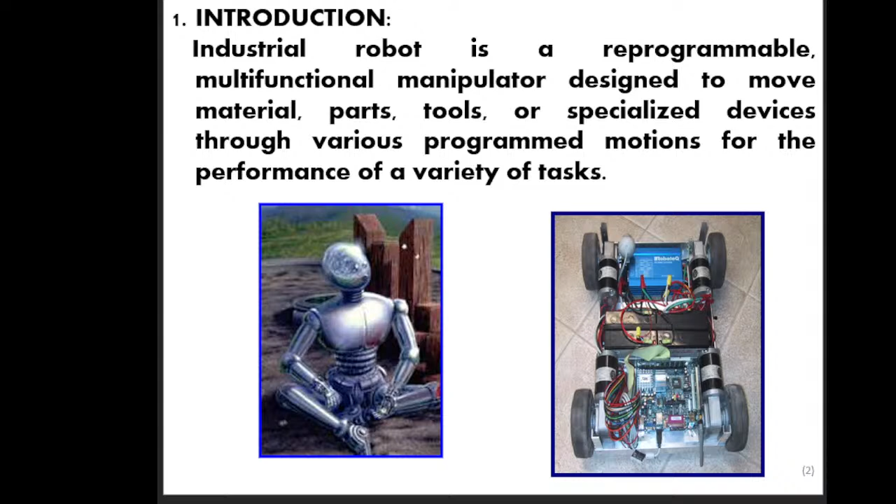Then another component is the controller. In the controller, we can say this is our brain. So the controller issues instructions to the robot, controls peripheral devices, and interfaces with the robot and also with the human.

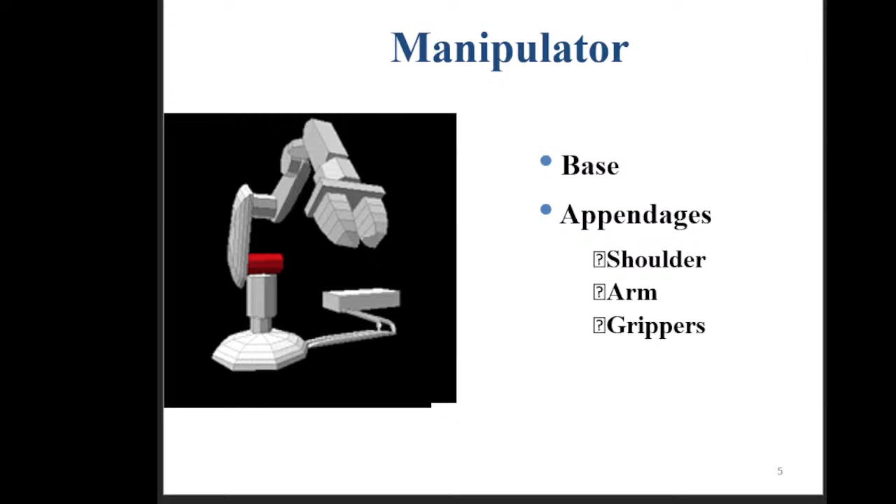Then end effector. We can say this is the end effector, also called the hand. This is a special tooling device. There are two types: one having a gripper, used for holding objects, and another having tools. At the end of it, this is called the hand, so here we can change it. Instead of a gripper, we can use tools like a spot welding attachment, spray welding, spray painting, and other devices to perform other works.

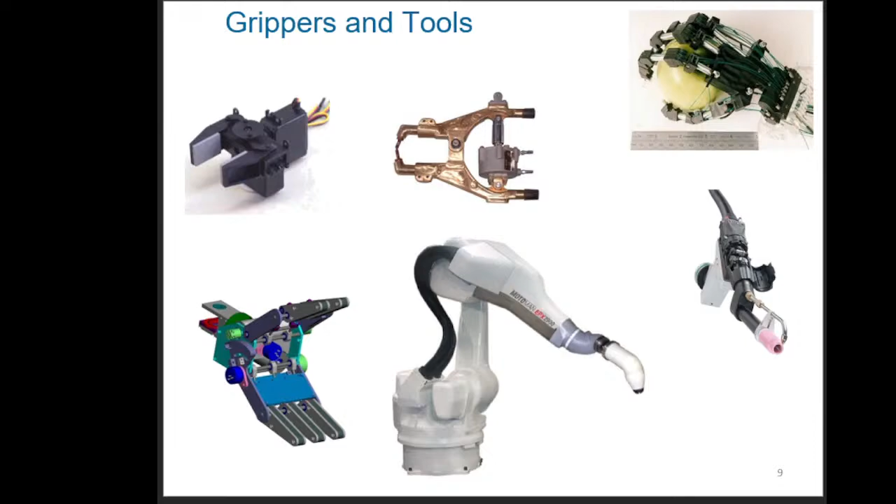So you see the gripper - this figure and this, all are grippers. They are having a 4-finger gripper, and this is called the tool. By removing the gripper, we fix the tool for gas welding, or arc gas welding purpose, and this one is for painting purpose. Then power source.

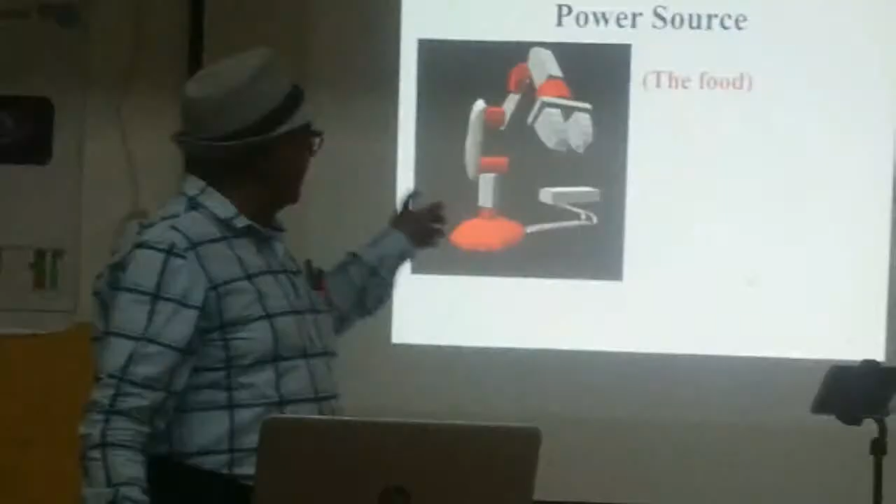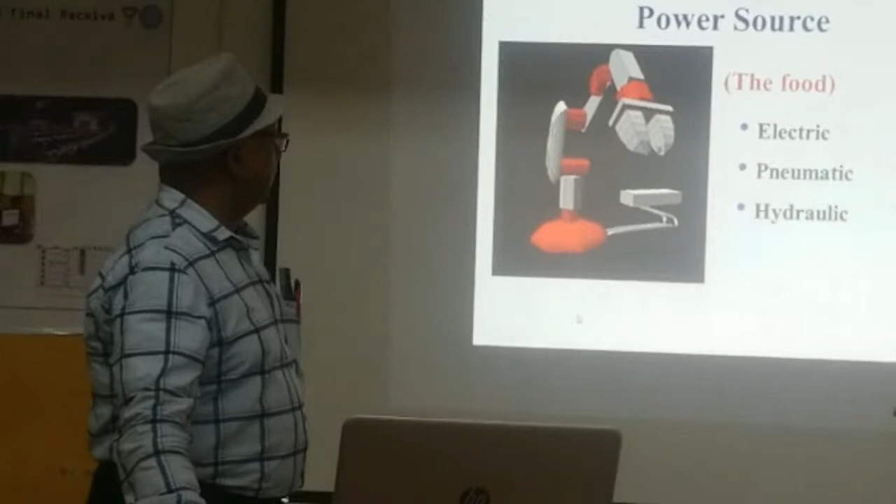Power source is just like our food. For us also there is a need for food; for robots also power is required. So you can find out by this color indicating where power is needed. For us only one person has a mouth for eating, but robots have different power sources required - so you can find the red color indicating where power is needed. They have different power sources: one will be electric, pneumatic, and hydraulic.

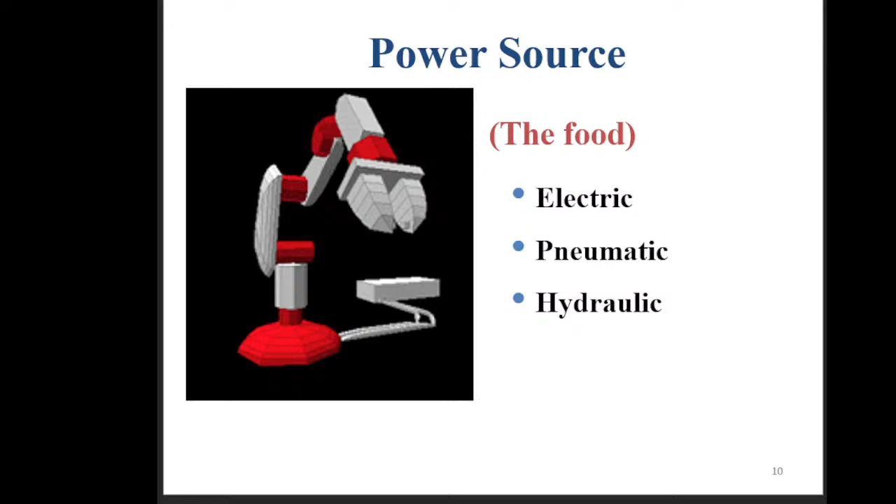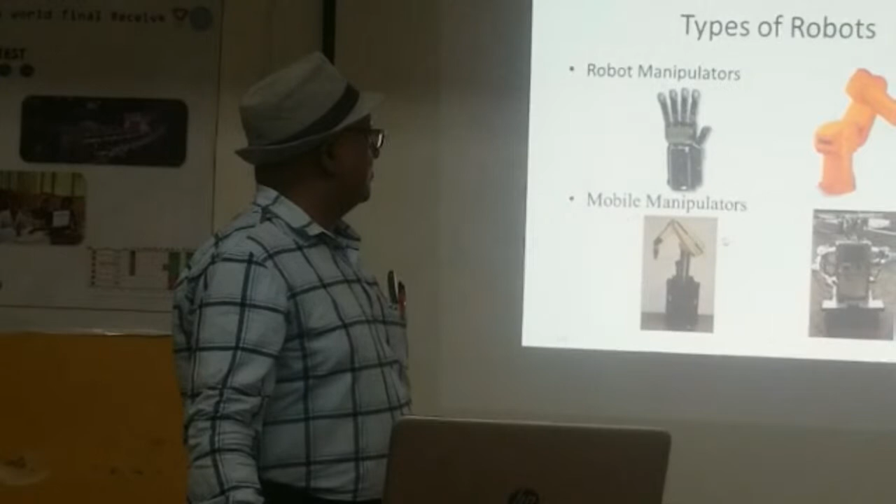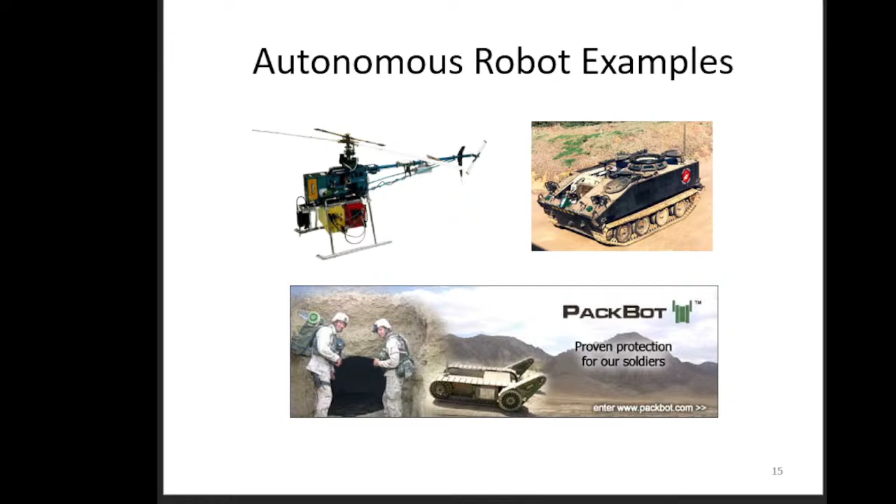Robot configuration: in robot configuration, one has robot anatomy, meaning structure. So in a robot there will be a manipulator. The manipulator consists of joints and links, and this robot manipulator we can divide into two sections: one will be the body arm, and another will be the wrist assembly.

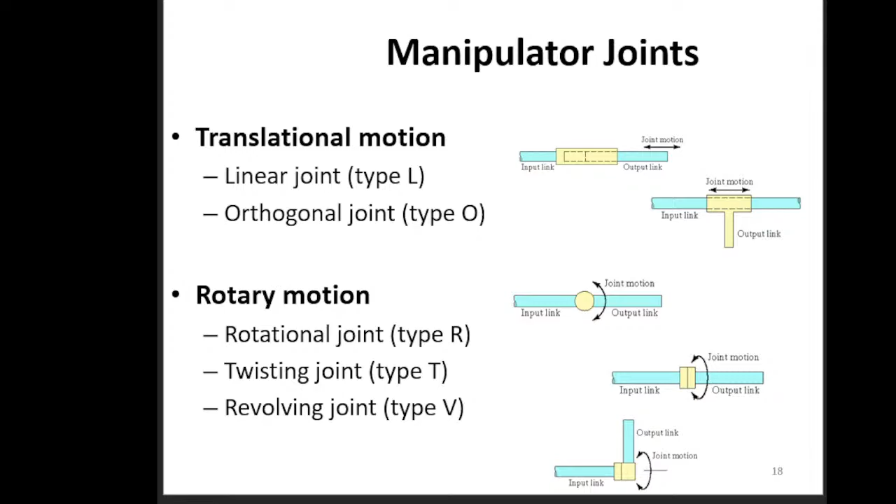Manipulator joints - how movement takes place about the joint. One is translational motion, where there will be linear movement and orthogonal joint, denoted by O. Then rotary motion, having rotational joint, twisting joint, and revolving joint. These are the different types of joints, denoted by different symbols.

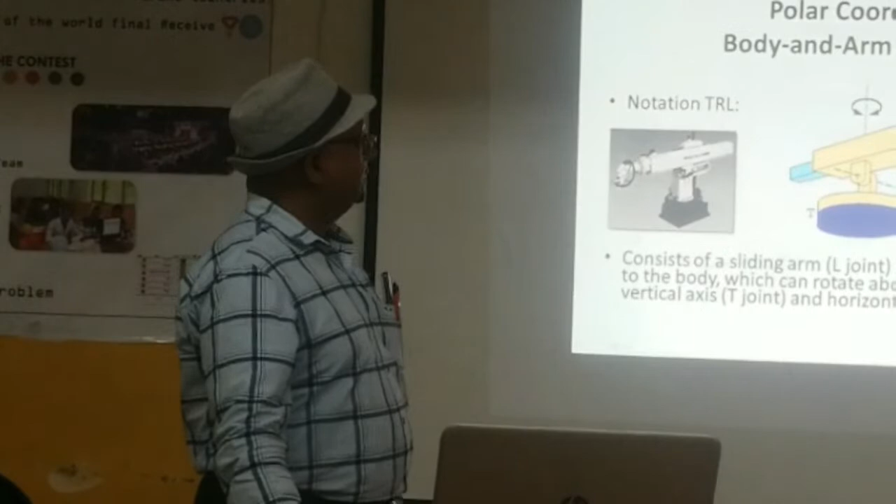In the polar coordinate body arm assembly, this type of robot has three movements: one twisting, one rotating, and another having a linear movement.

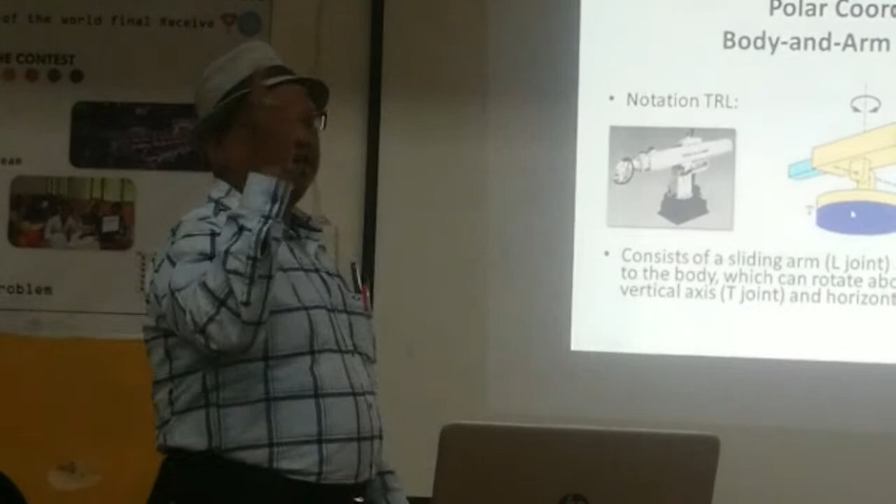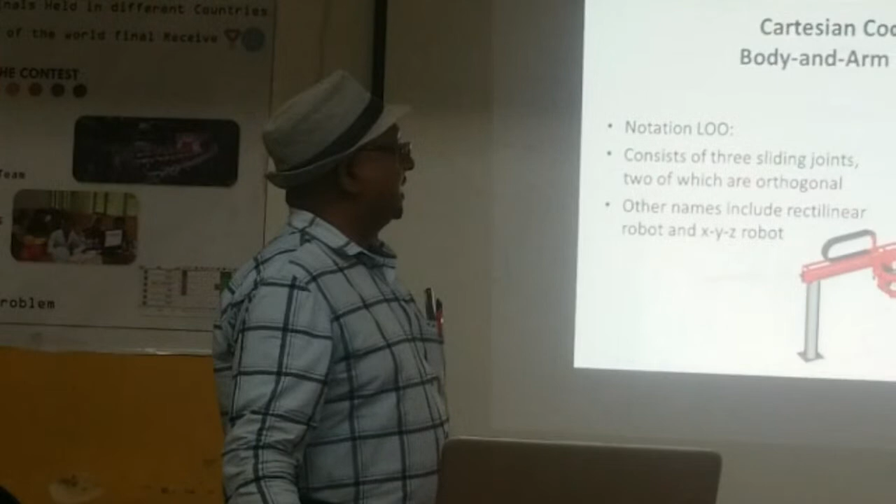Then another type, the cylindrical body arm assembly robot - in this there will be twisting, then linear movement, then orthogonal movement. Then the Cartesian coordinate body arm assembly has linear movement, then orthogonal movement, and another orthogonal movement.

Joint arm robot - in this there will be twisting, then rotating, and then another rotating.

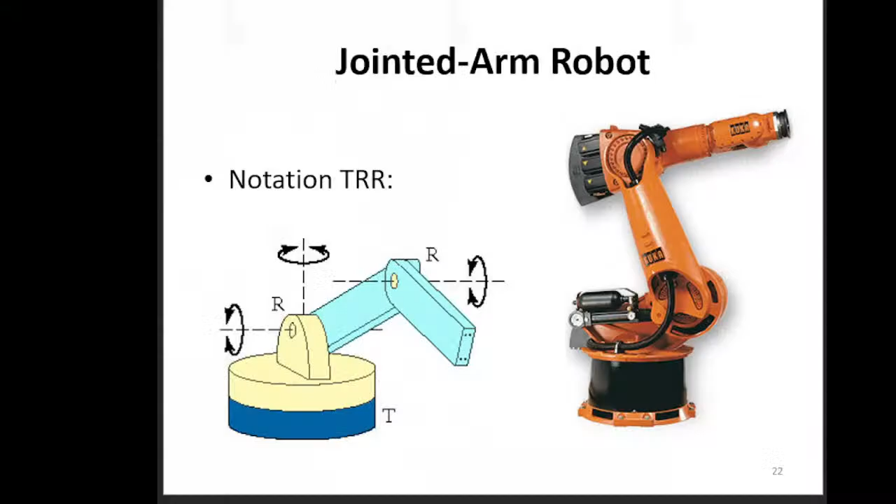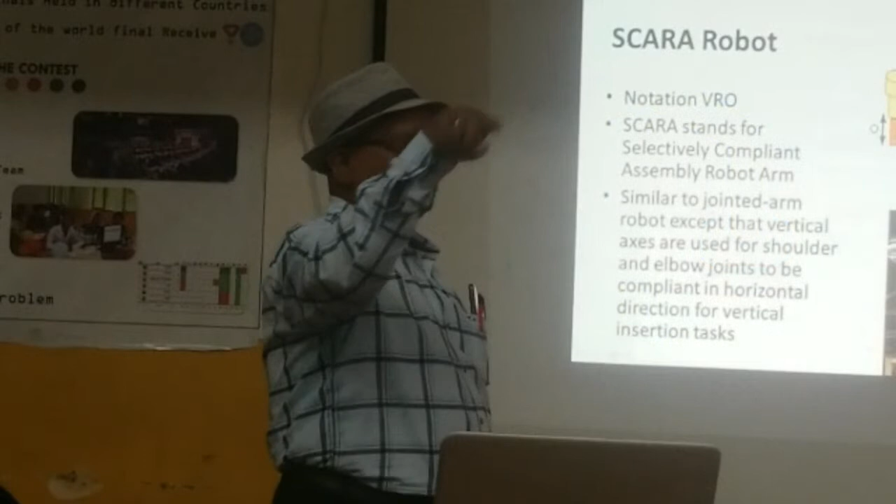Then another type is the SCARA robot. In case of a SCARA robot, there will be revolving, not twisting, then rotation, and then orthogonal movement.

Then wrist configuration - the wrist assembly is attached to the end of the arm, and it consists of roll, then yaw - yaw means this kind of movement - then pitching, like pitching is there. I think we have studied this in mechanics of machines, where they have a gyroscopic couple, in which we can find roll, pitch, and yaw.

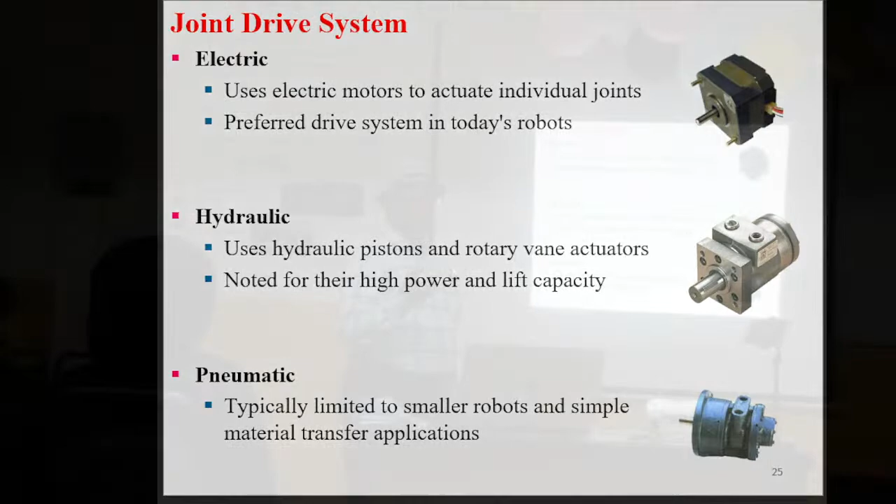Then joint drive system. Now we have seen regarding the configuration and different types. Now let's see how the drive system will work.

There will be an electric system, where electric motor is used to actuate individual joints. In case of hydraulic, they use hydraulic piston and rotary vane actuator. Pneumatic systems are limited for small robots.

Then robot control system. For controlling the robot, there are different systems: limited sequence control, playback with point-to-point control, playback with continuous path control, and intelligent control. These are the different types of control systems.

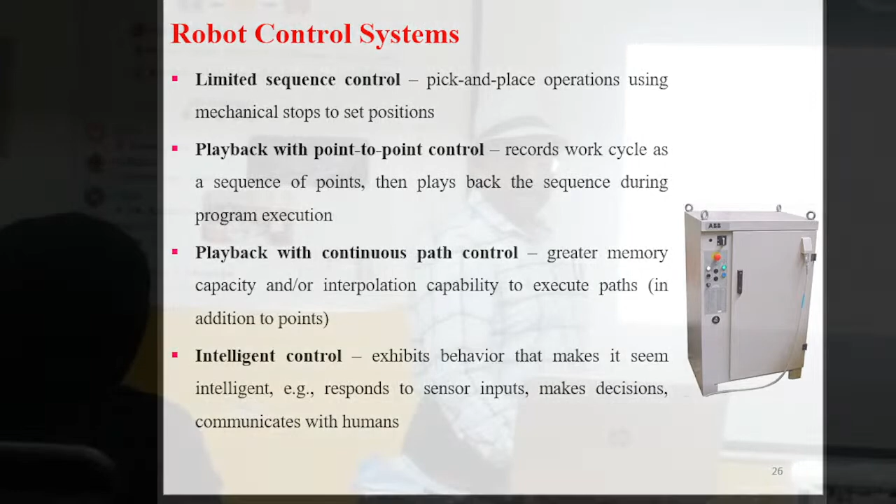Now come to the robot sensor. Why are we using sensors in the robot? The sensor is used to measure the condition of the robot and its surrounding environment. Why do we need a robot sensor? Because for smooth functioning of the robot, they have different types of sensors.

When you go to the 4th year, mechanical department has a mechatronics course, and maybe other departments also have mechatronics. So we are teaching different varieties of robot sensors. How many types of main sensors are there? There are 7 types of sensors that I am going to display here.

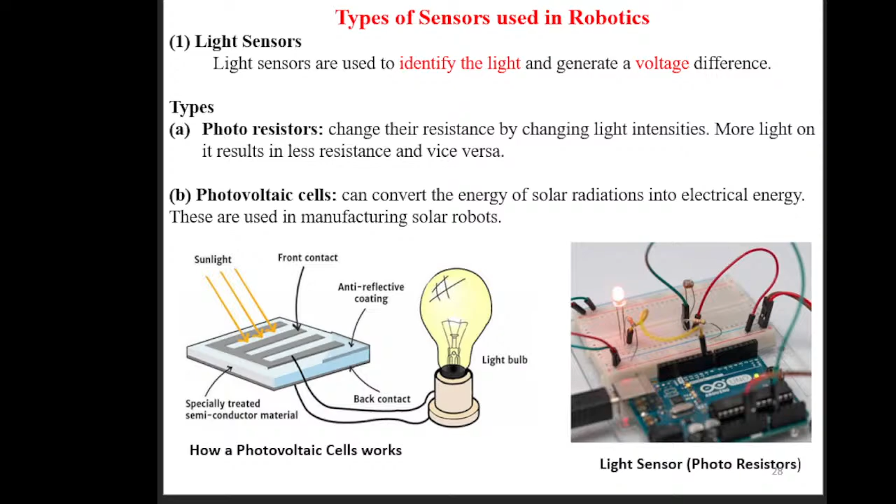One is the light sensor, used to identify light and generate a difference of voltage. They also have two types: photoresistor and photovoltaic cell. So we can see the figure.

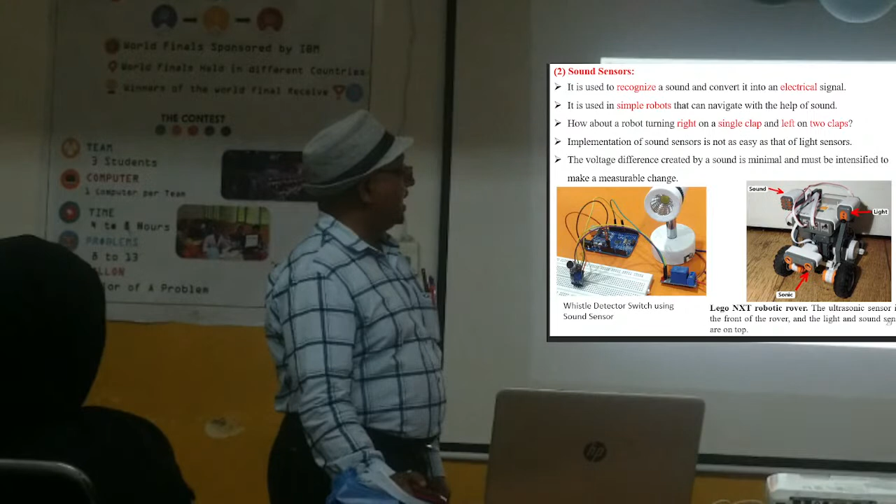Then sound sensor. It is used to recognize sound and convert it into an electrical signal. So with the help of sound, if you give one clap, the robot will turn right. If you give two claps, it will turn left. You can see here one sensor in the Lego NXT robotics rover, which has an ultrasonic sensor in front, a sound sensor, and a light sensor. Accordingly it will work.

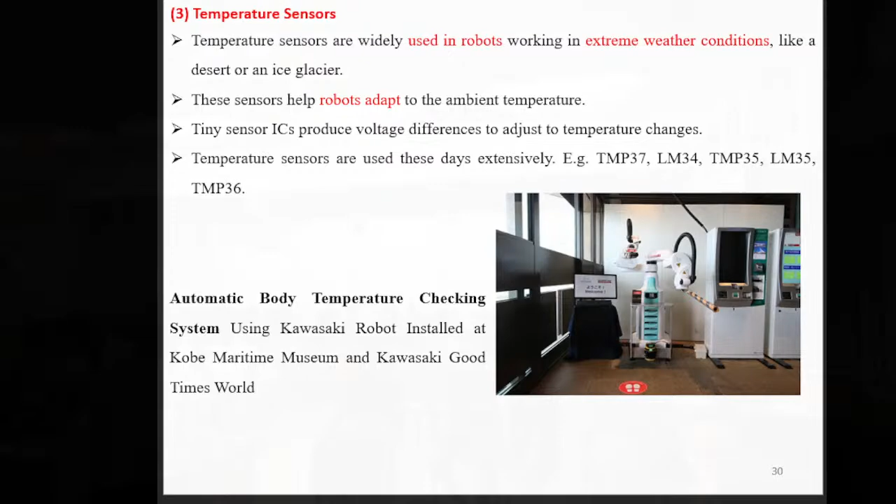Then temperature sensor. Temperature sensors are also used in robots where the working environment is an extreme condition, like a desert area or ice glacier. We can find here a Kawasaki robot installed in the Kobe Maritime Museum. This robot has automatic temperature sensing devices included. So when a person goes inside, it will measure the temperature of the room of the museum and automatically display it. So this is regarding the temperature sensor.

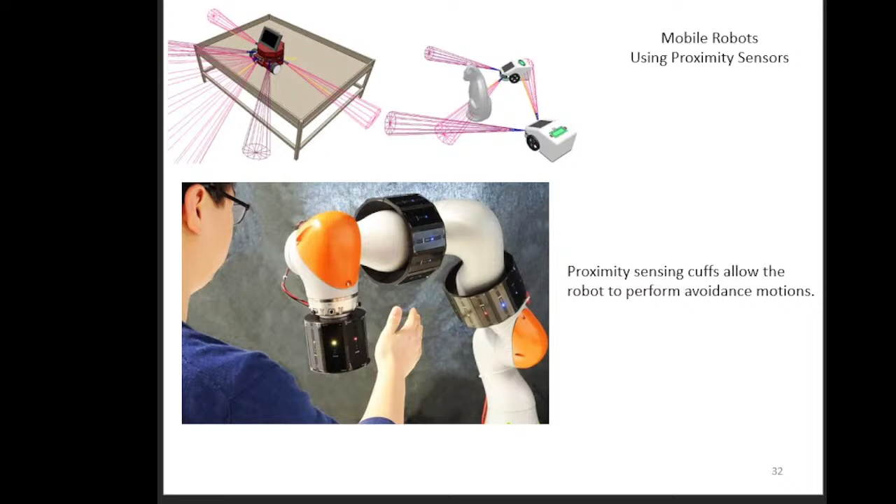Another is the force sensor. In this, the robot is gripping, catching a component and placing it from one place to another, and this happens due to force only. If there is less force in the gripper, it cannot transfer the component from one place to another. So according to the requirement, how much force is required to catch and move the component, this type of sensor is added there.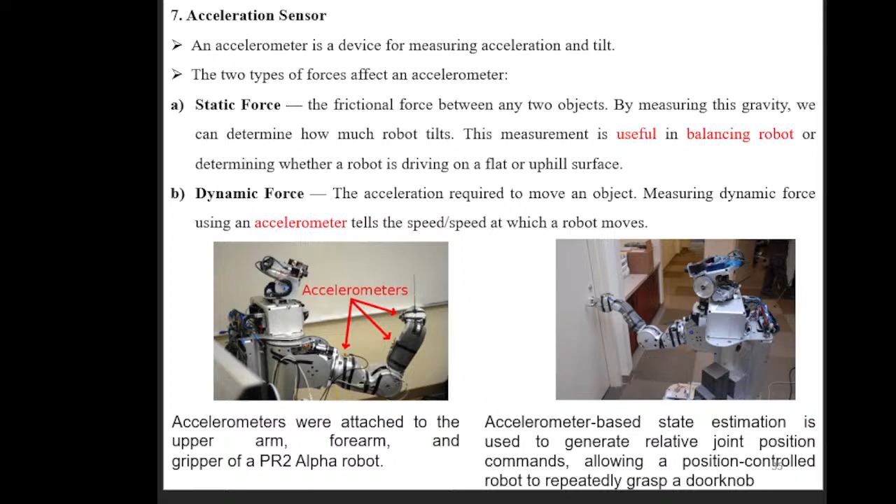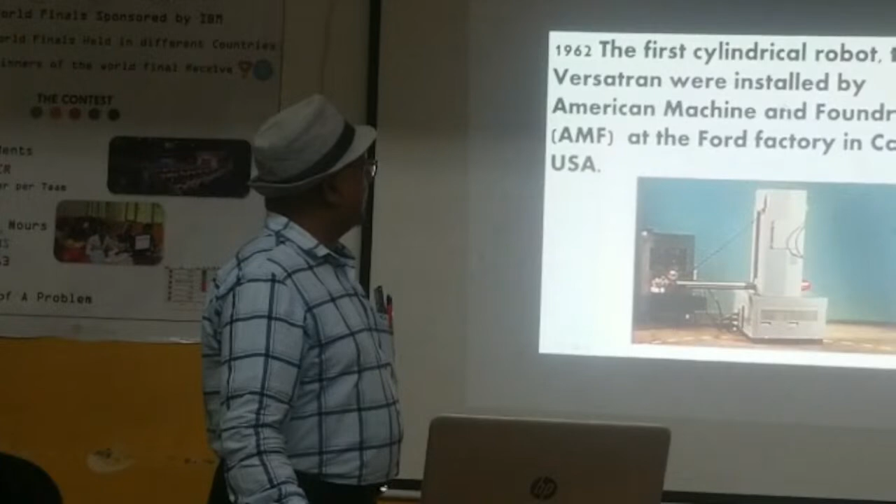After that, in 1961, Unimation USA installed the first industrial robot used on a production line at General Motors. Then in 1962, the first cylindrical robot was installed by the American Machine and Foundry at a Ford factory in Canton, US. In 1969, General Motors installed the first spot welding robot at its Lordstown assembly plant.

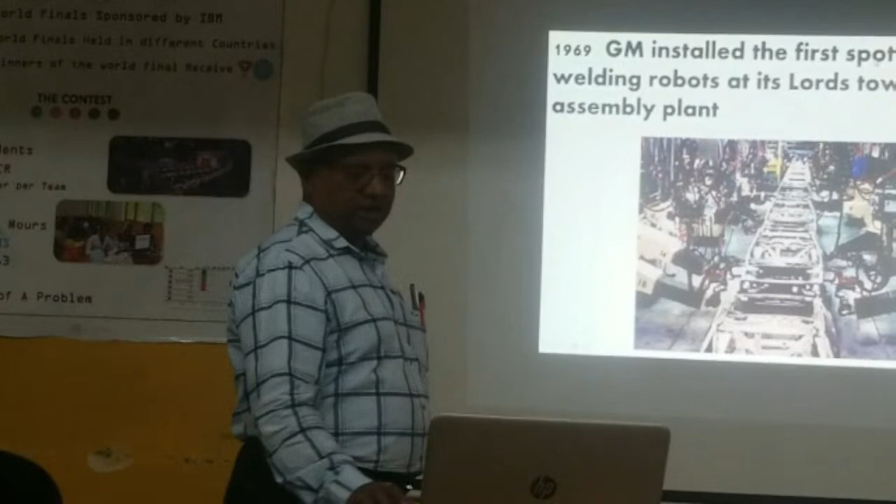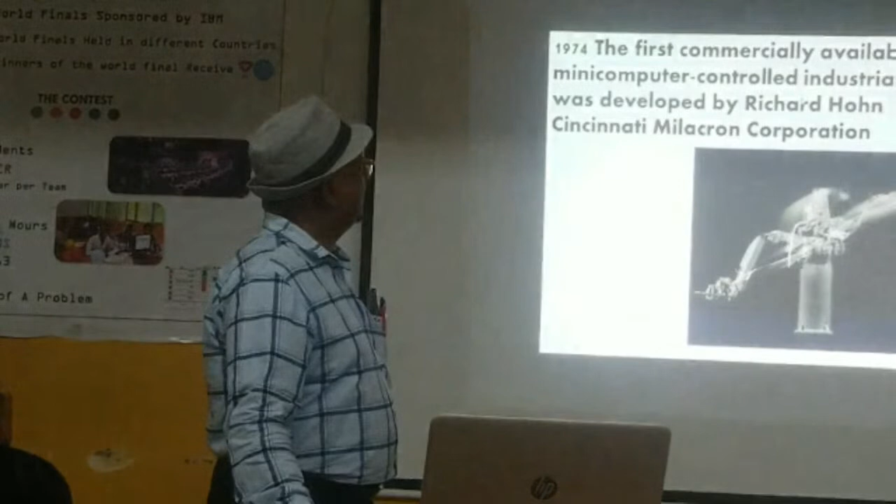In 1969, Tralfa Norway offered the first commercial... In 1974, the first commercially available mini-computer controlled industrial robot was developed by Richard Hohn.

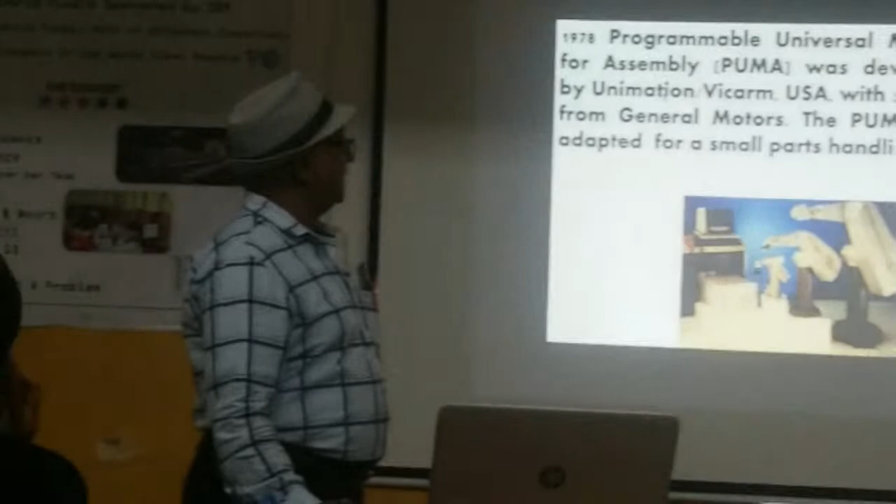You can see the figure. In 1978, Puma was developed by Unimation USA with support from General Motors, and this was used for small part handling.

In 1985, the KUKA robot came. KUKA robot, Germany, introduced a new Z-shaped robot design that ignored the traditional parallelogram, giving it flexibility. 6 degrees of freedom were developed in this robot.

In 1992, Demaurex, Switzerland, sold its first Delta robot packaging application to Roland. This was used for packaging purposes.

In 1998, ABB Sweden developed the world's fastest picking robot based on the Delta robot.

In 2004, Motoman Japan introduced an improved robot control system. You see how many axes it has - up to 38 axes. Then in 2006, KUKA Germany presented the first lightweight robot, suited for handling and assembly tasks.

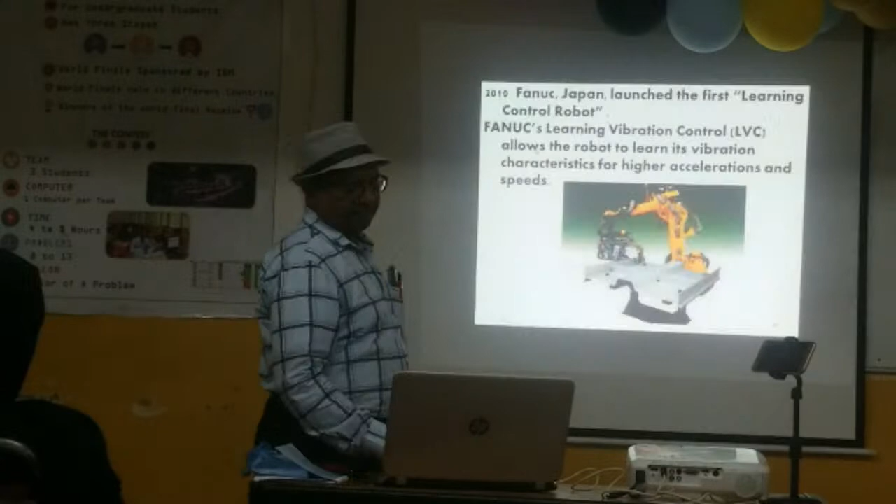In 2010, Fanuc Japan launched the first learning control robot. Then the Asimo robot - the Asimo robot is a humanoid robot developed by Honda.

Entertainment robot - after that, entertainment robot from Sarcos. Another one, Cog, is also a humanoid robot developed in the MIT lab, based upon artificial intelligence.

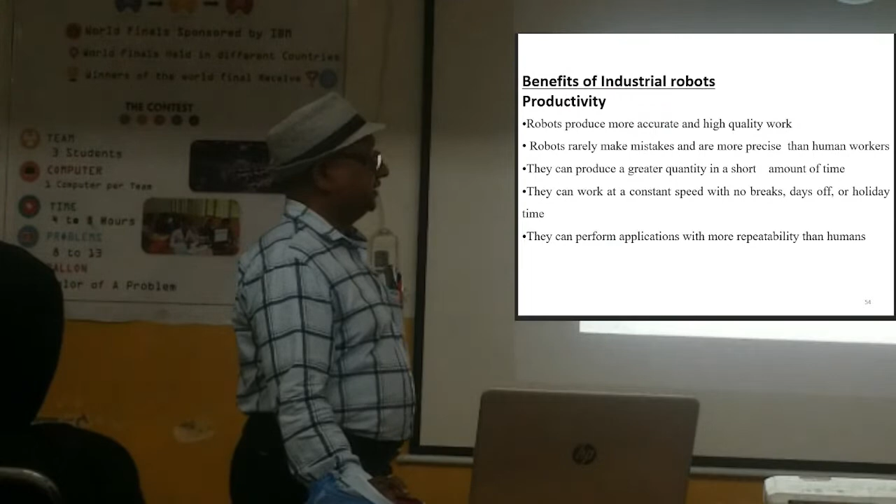Now, benefits of industrial robots. What are the benefits? Productivity - robots produce more accurate and high quality work. Robots rarely make mistakes and are more precise than human workers. They can produce greater quantity in a short amount of time, and work at a constant speed with no breaks, days off, or holidays for the robot.

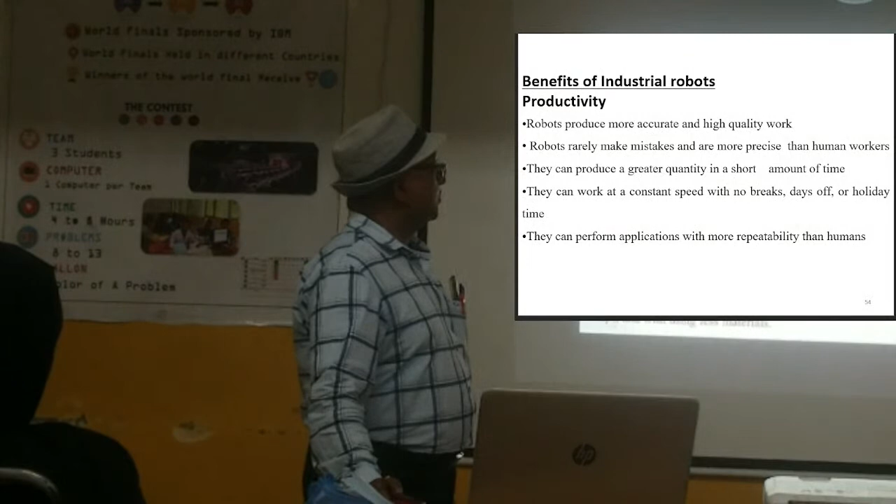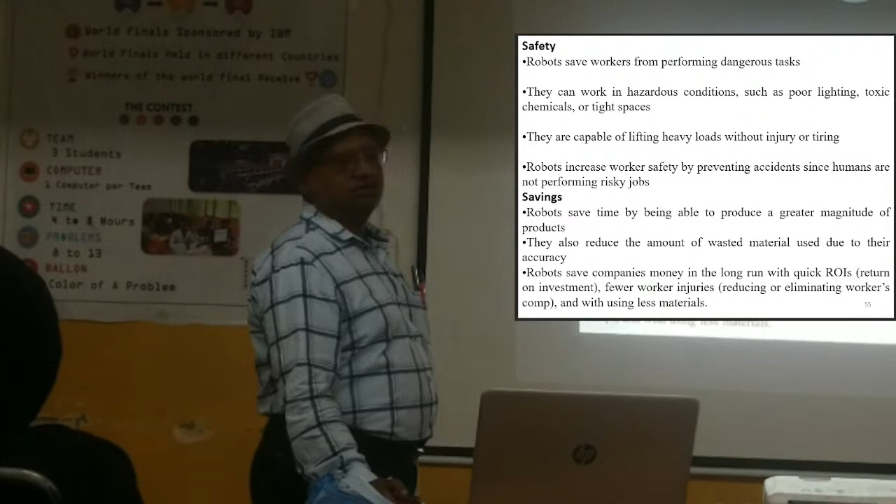In case of saving, robots save time by being able to produce a greater magnitude of product. They also reduce the amount of waste material used due to their accuracy, and robots save companies money in the long run with a quick return on investment.

These robots are commonly used for material handling parts as well as degating and finishing operations like deburring and grinding.

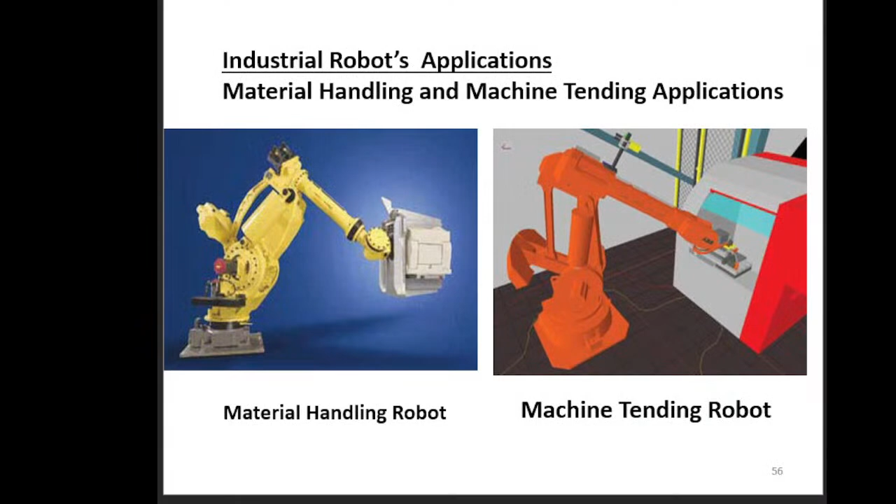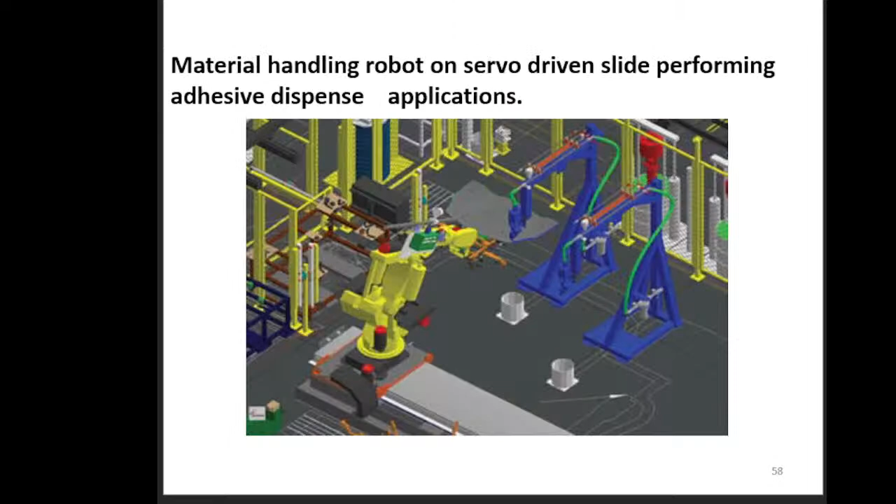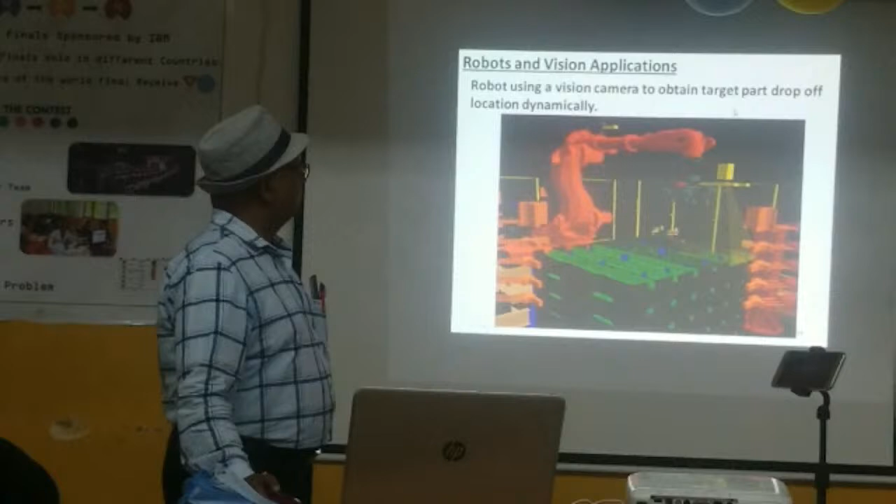Another having robot and vision application - you see these robots having a vision camera also. The robot uses a vision camera to obtain the target part's drop location dynamically. The robot performs vision inspection on an auto body as part of a flexible measurement system. This type of robot we can find in the automobile industry.

Then cooperative application and coordinated motion - you see there are two robots, one handling the parts and another doing the operation.

Here, a single robot is used to organize a small quantity of inventory to efficiently stage individual orders to be shipped. Here, two robots are used to load, unload, and weld parts with little human intervention and a high degree of accuracy.

Then robot and cycle time. Robot speeds the palletizing of motors while reducing waste and concern of workers being hurt.

Then articulated industrial robots operating in the foundry industry, also using industrial robots. Then here you can find a 6-axis industrial robot used for welding purposes.

Then here you can find factory automation with industrial robots for palletizing food products like bread and toast at a bakery in Germany.

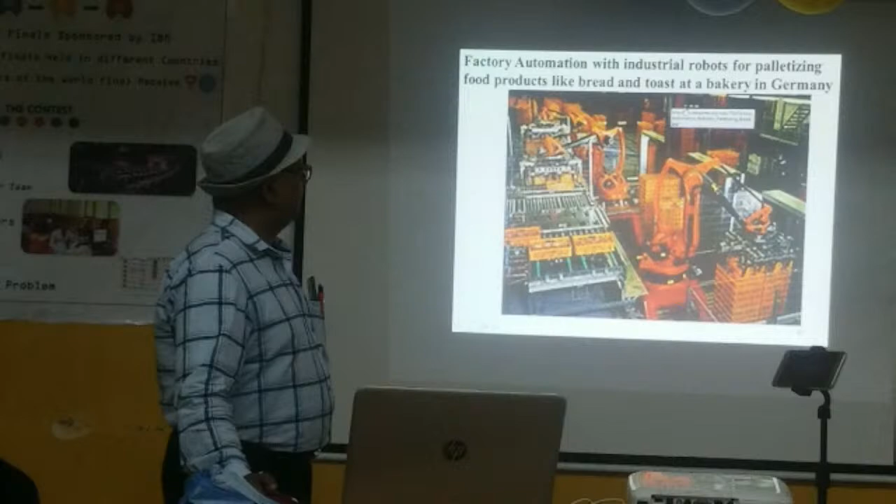Then robots are currently used in the police, army, navy and air force also. Now with the Ukraine and Russia fighting going on, we can see such types of robots doing the work.

Then NASA scientists use robotics technology for Mars exploration. Here also they are having robot technology.

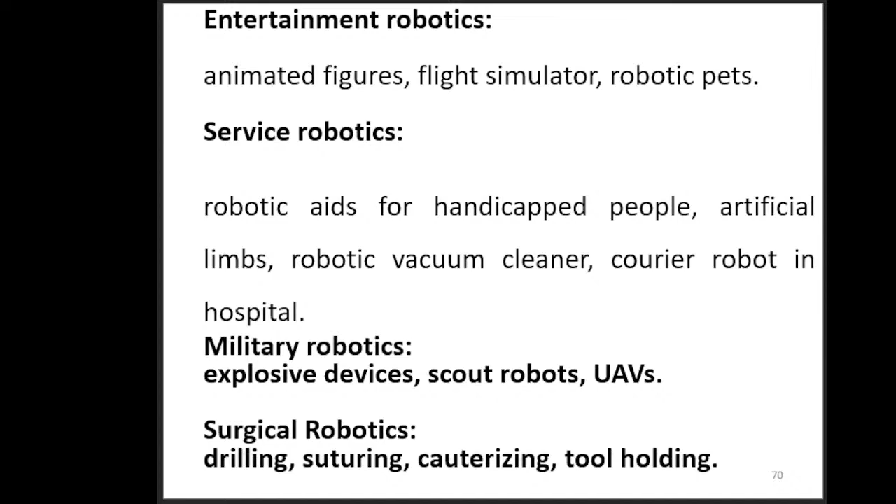Then another type of robot is used in animation and entertainment robotics, like animated figures, flight simulators, and robotic pets. And in the service robotics area, robots are used for handicapped people, artificial limbs, robotic vacuum cleaners, and courier robots in hospitals.

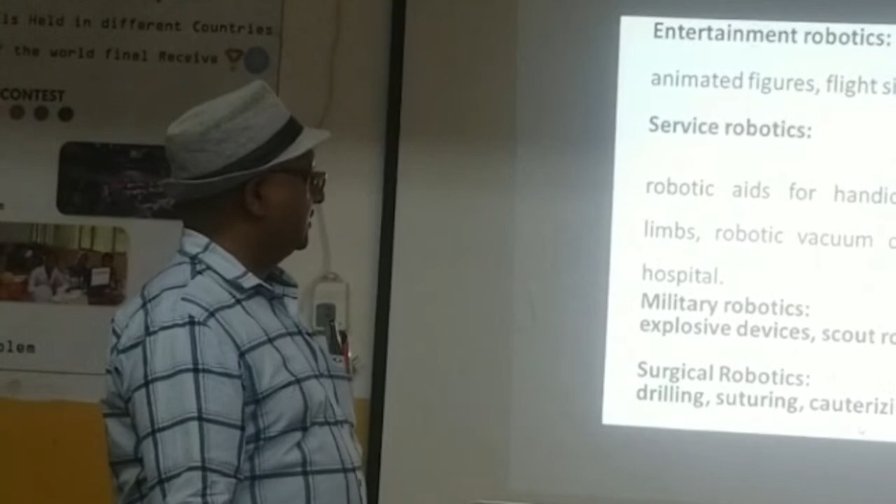Another area, military robotics, involves explosive devices, scout robots, and unmanned aerial vehicles. And in surgical operations also, there are surgical robots for drilling, suturing, and tool holding in that area.

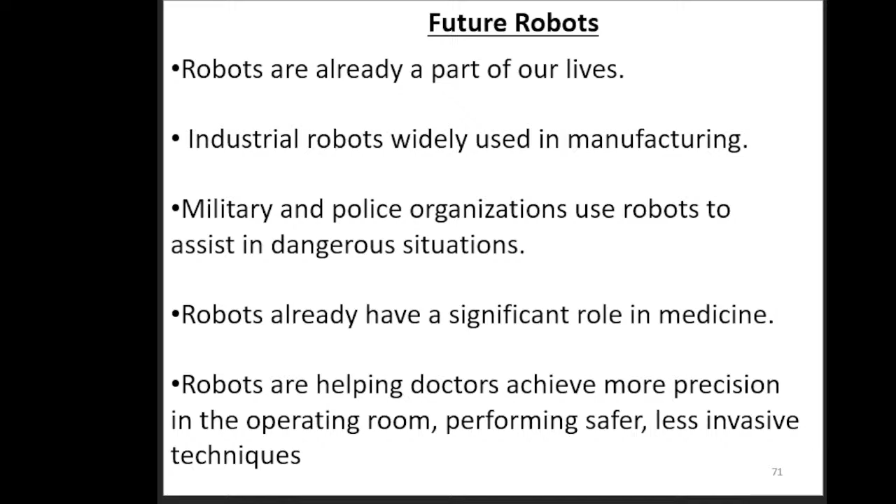Then future robots. So by seeing this, you can find out where they are using robots. Now robots are already a part of our life, and industrial robots are widely used in manufacturing. Military and police organizations use robots to assist in dangerous situations also.

So that future robot, for civil use in the future of robots in civil applications, around 2023 or nearer to that, there will be full automation in heavy machinery.

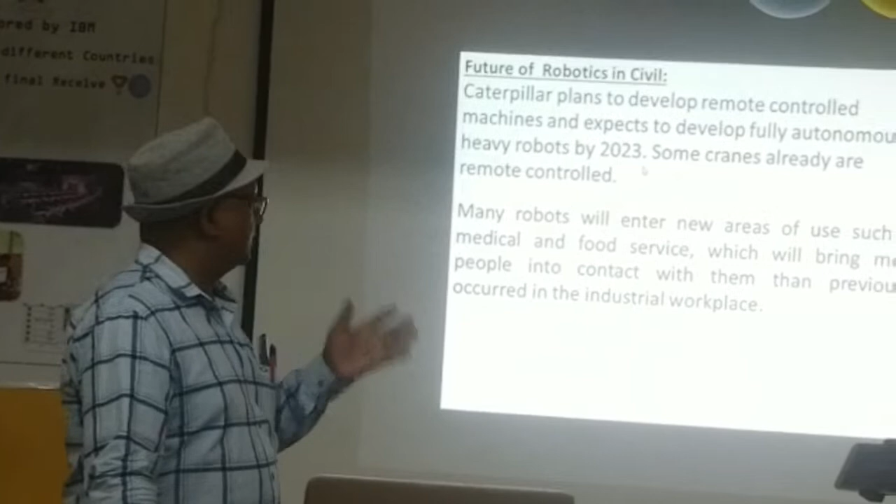Now also you can find, for building construction also, they are using different types of robots. Another area is handling dangerous radioactive waste, where they are also going to use robots. Exploration, mining, construction - in this area also they are going to use robots.

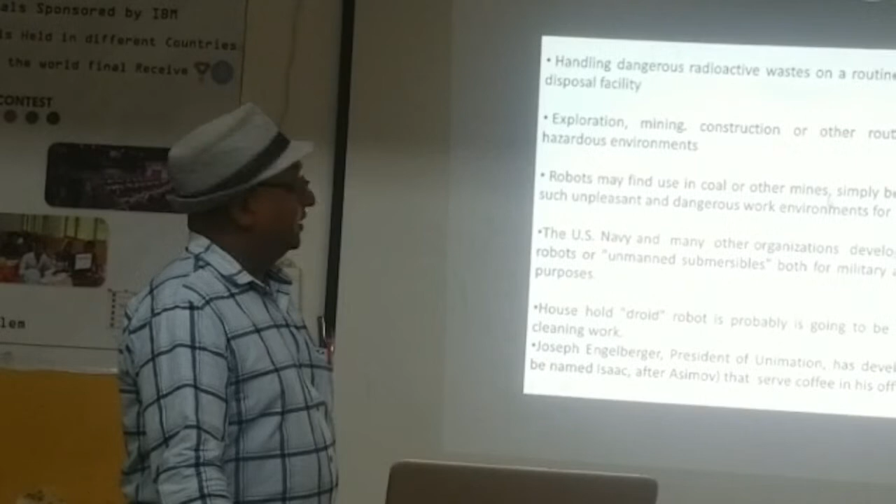Robots may be found in coal and other mining areas. And the US Navy and many other organizations are developing robots to work as a force, like the army.

So here in future robots, they are having a Demeter robot. This robot will harvest the crops according to the sensing devices involved in it.

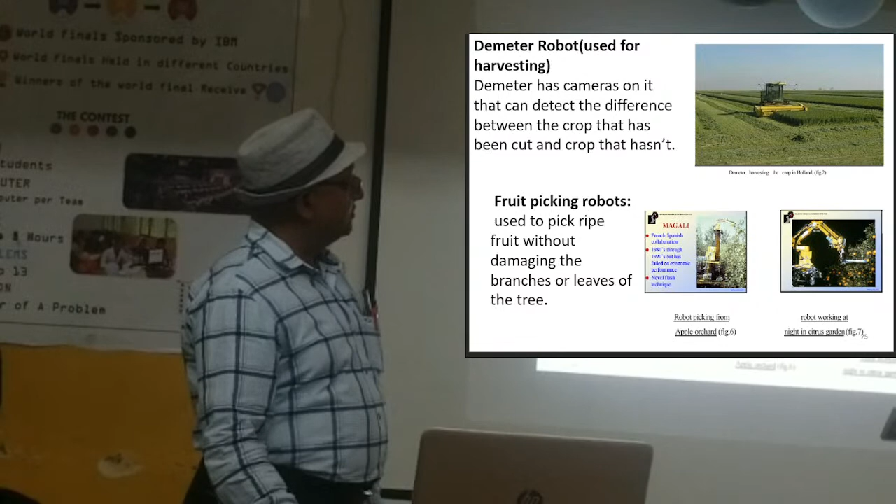So if some area has crops ready for cutting, it will cut only that; other areas it will not cut. That's why it's written here that Demeter has a camera on it that can detect the difference between crops that have been cut and crops that have not.

Correct? Another one is the fruit picking robot. So in the future there will also be a fruit picking robot.

So as I told you, different types of sensors like light sensors are used. By seeing with the help of lighting, the robot can identify if the fruit is ready for plucking or not. If it is ready, then it will pluck the fruit. So that's why in the future, fruit picking robots will also be available.

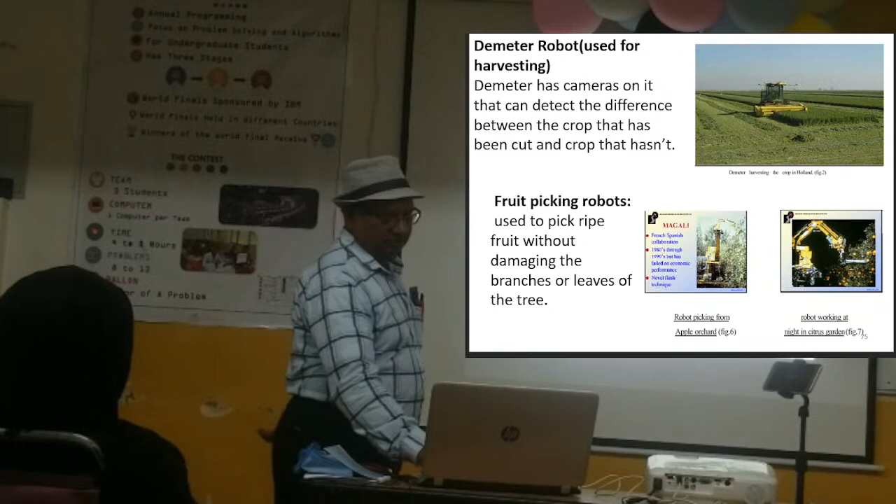Now we have seen the different types of robots. They are going to be used in the future also, and presently also they are working. Now they are using artificial intelligent robots.

Artificial intelligent robot - I think you might know, the first artificial intelligent robot named Sophia was developed. You can see the video, you can talk with her.

Sound is not coming. I don't know if there is sound or not, but I think the sound is not reaching up to you, correct? But I have given full sound, I don't know what the reason is.

Robotic Kitchen: a robot designed to cook for you so that you can concentrate on other things.

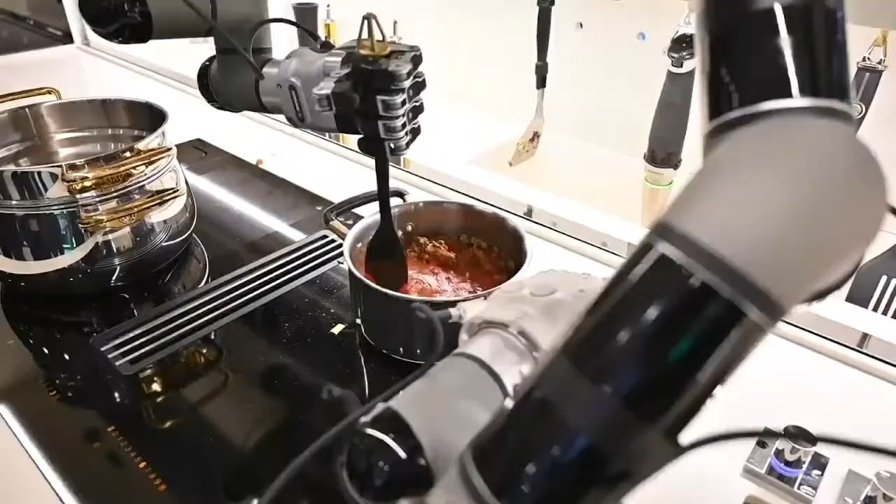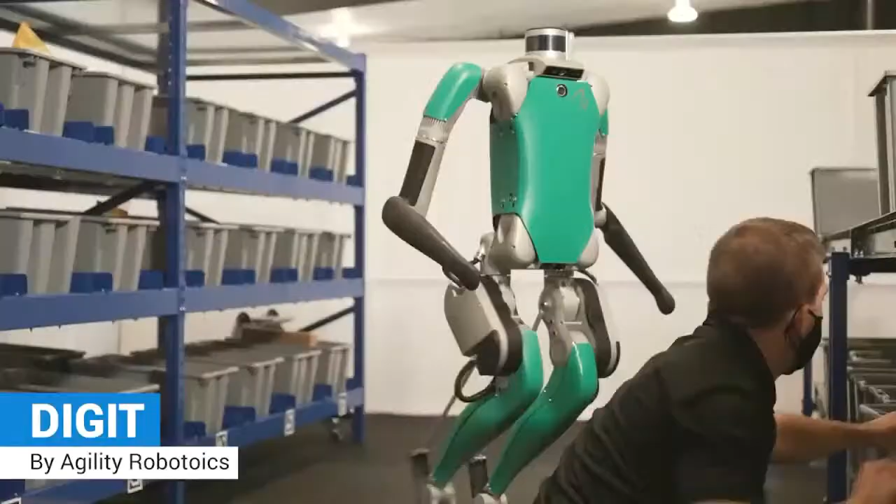Digit: a humanoid robot that is designed to work with humans and in human spaces.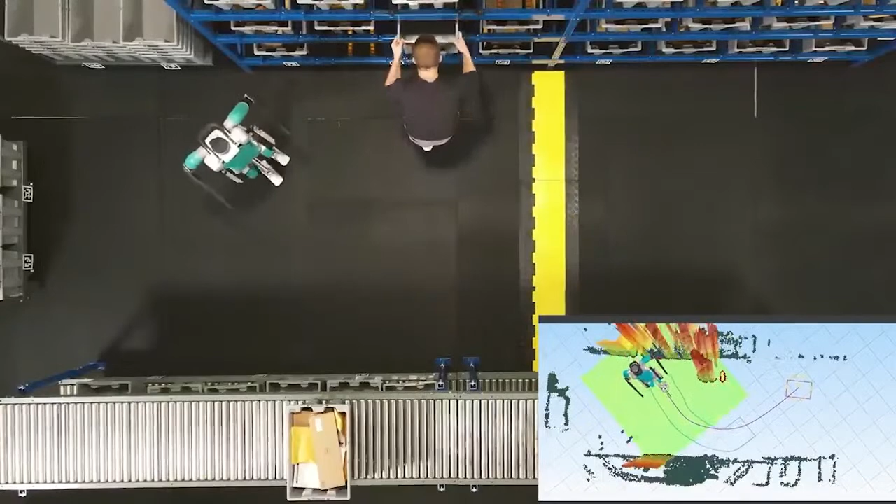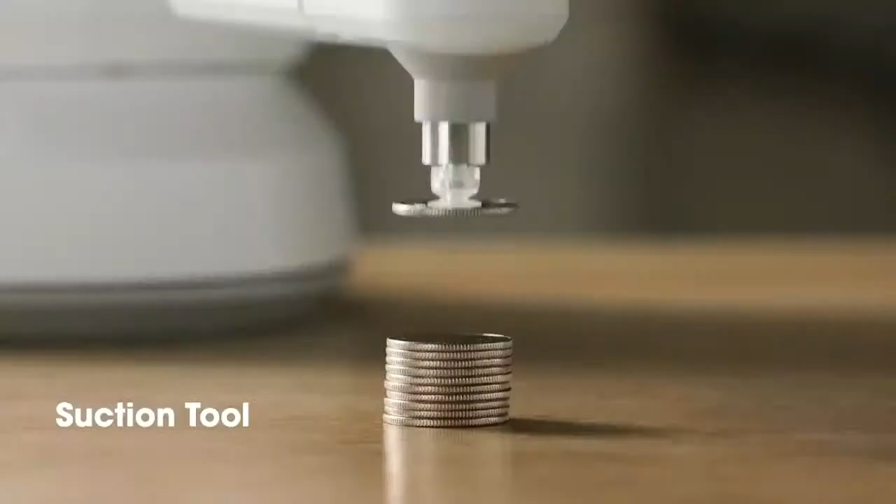So you can see in the future about how it will work. So there is a prediction also. This is what I am saying, it is going to get exist.

Because in future, after some years, see, temperature is increasing and increasing. So after a few years, temperature will be high, so that in that environment, humans cannot work, cannot go in the field and do the farming, the harvesting. So due to such climate, such high temperature, man cannot work.

So during that situation, robots only will work. Like now, presently every person has a cycle. During that time, after maybe 15 or 20 or 30 years, every house will have a robot. That robot will work as a servant, it will go for farming purposes also, it will do many types of work. Correct?

So I am showing, so now we are seeing this future robot. So in current, how logistic robot is working in the logistic area. Just I am showing this and then you will stop. Then I will show you the demo of the sensor, how sensor will work.

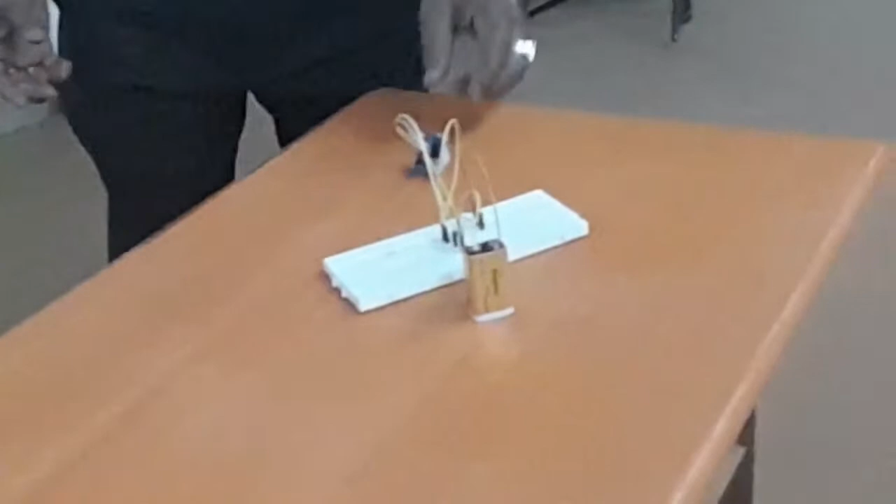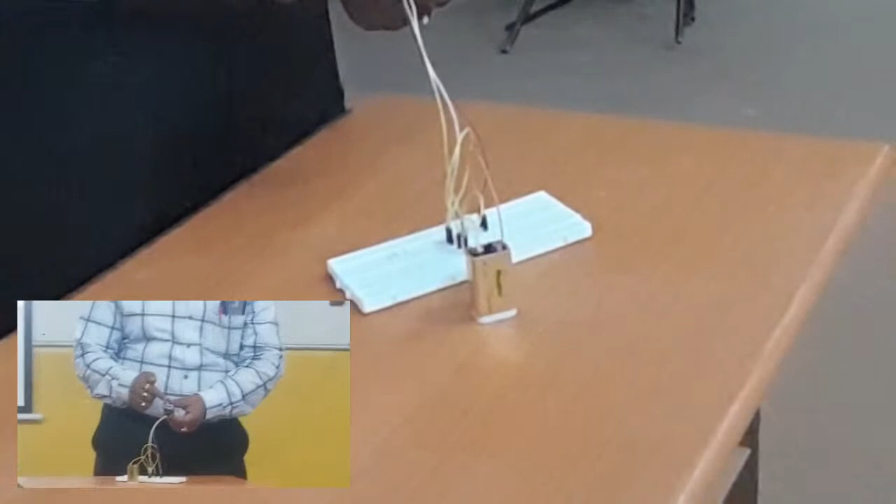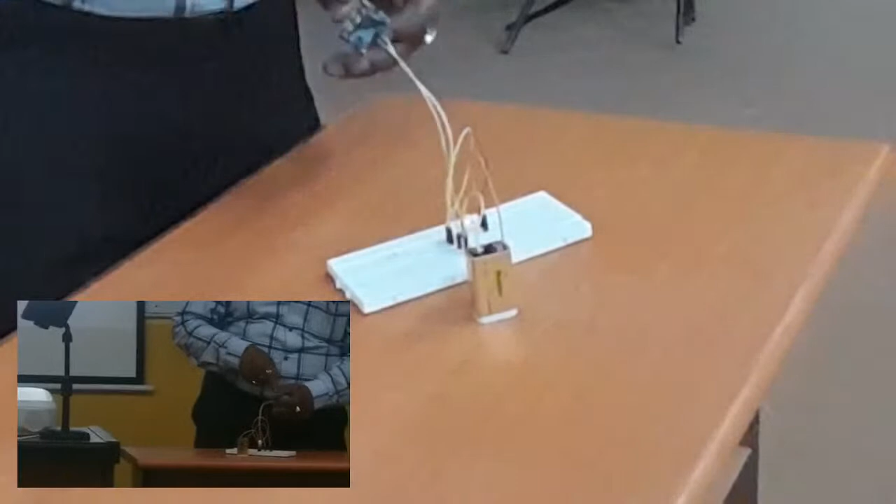So now I have placed it in the outer pin and one middle pin, this yellow pin. Correct? So due to that, there is no repetition. Suppose I am standing, after few minutes it's off. When I will move, it will glow.

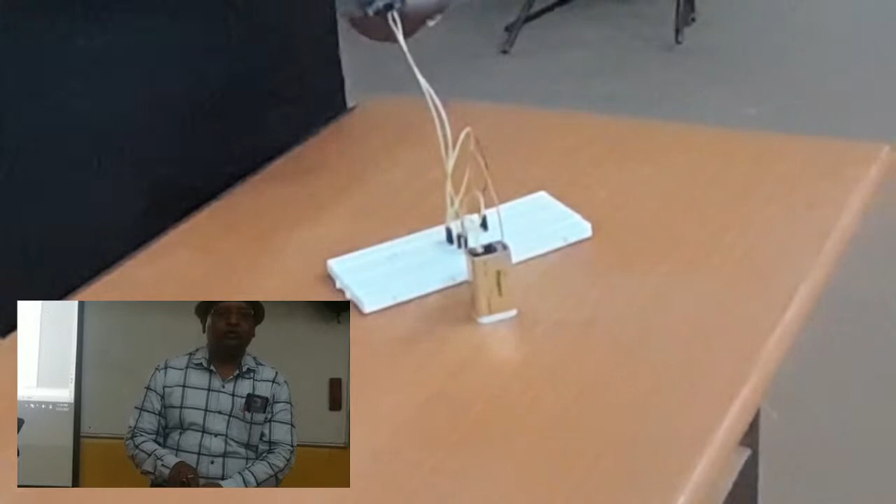If this yellow pin, when you change it from one - there is a 3 pin - so now I have placed it in the external pin and middle pin. Due to that, there is no repetition. When I am moving, it is working. When it is standing, it is switched off.

Correct? But when you put this internal pin and middle pin, in that case, there will be repetition. After some time, it will glow; sometimes it will stop. Correct? So how does this work?

They have a black color component, this is a capacitor. Here also, blue color is also a capacitor, and they have brown color - 2 brown color pins are here. So they have timing devices - timing. One pin is for timing, to control the timing. Another is for distance.

When you rotate clockwise or anti-clockwise, you can reduce the time. You see, I have fixed a very small time. Now off - when I will move, after some seconds, it will work. You see, now it works. I have set a very small time for demonstration purposes. If you want, we can increase the time - it will glow for a longer time.

And they have another pin for distance. When you turn it anti-clockwise, it will reduce to the minimum distance - 1 meter or a very small distance it will measure. When you turn it clockwise, it will measure up to 5 meters. So this sensor has such capacity, it can measure up to 5 meters distance.

You can rotate the field with the help of a screw. Correct? So you see, now I am moving, then it is working. When I will stop here and stand, it will not work. Correct? So this is called a motion sensor.

So this type of device we can use for energy saving purposes, like in a bathroom. People going into the bathroom will forget to switch off the light. In that case, just put these devices. When you enter the bathroom, light will glow, and after some time, light will be off automatically. Correct? So this type of system you can also set up in a car.

Suppose a thief is coming and starts stealing - during that time, we can put a horn here also. It will give the sound.

So these devices, now I am showing as a motion sensor. We can say this is a motion sensor, or we can say this is a proximity sensor. Without touching, this is working. Correct? This sensor is working.

Correct? So if anybody wants to see, you can come and check if this is working or not for you. Come, anybody come? Come on, so come.